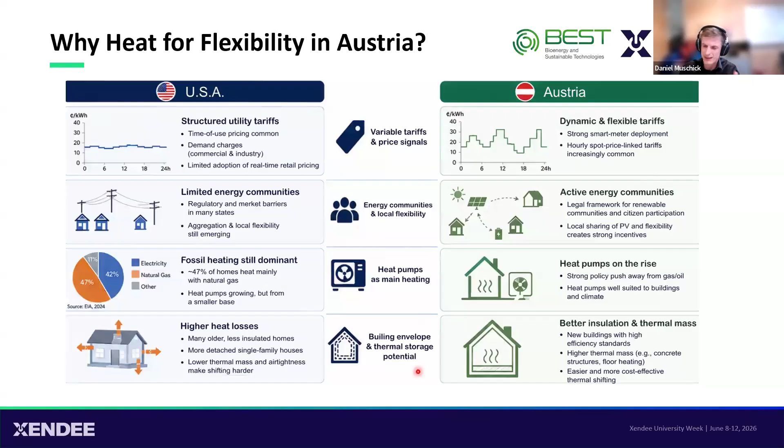So it is possible to use these buildings as a storage for heat and through the heat pump also for electricity. Just to give a very brief overview of what this means. So typically, if you have a single family home, you might have PV plus battery, and this battery might have 5 to 15 kilowatt hours of capacity.

And if you look at the heating sector, even with a rather small storage of 1,000 liters and only a temperature spread of 10 Kelvin, so 45 to 55 degrees Celsius, this already is more or less of the same capacity as a big battery, only for very small thermal storage. And so we have this capacity, and it's mostly available anyway. So if you build a home, you install a heat pump, you will have a heat storage, and you can make it bigger if you want.

And the price difference is almost or even more in some cases than tenfold. So it costs a tenth of the price to have the same capacity for heat than for electricity. Of course, you have to be a bit more honest here, because storing heat is not the same as storing electricity. If your heat pump has a coefficient of performance of 4, you only have a fourth of this capacity available as capacity for electricity. But still, it means that a substantial amount of capacity is there to shift electrical demand. So it's much more affordable.

And there's also something else that comes into play, which is that we have this building mass available. We have, as I said, well-insulated homes with a higher thermal mass. That means we can use the building itself as a storage. The problem with this is that heat is also a little bit more complicated, and that's where my research comes into play. Heat comes in different flavors. You have different temperature levels.

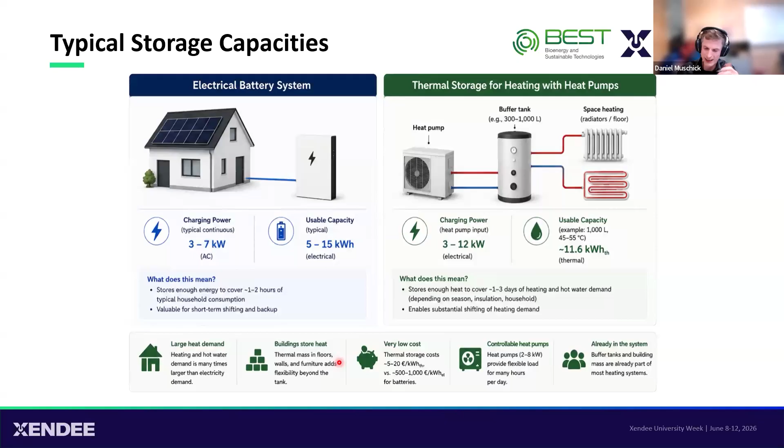And especially if you think about using the entire building as a storage, it's not as easy as that, because, of course, how you operate your system influences how much capacity you have. You can't just heat up a building and then leave it at that. The building will cool down again. People will get uncomfortable. So it's getting a little bit more complicated. In order to use all of this flexibility, we need some kind of predictive framework that can take this complexity into account. And so this is what we are developing at BEST.

So we're trying to tackle some challenges with our solutions. One of the challenges that we see is that we want to have optimal operation, not just any operation. So we are focused on optimization-based approaches using mathematical optimization. We have the big problem that many things here for using flexibility are volatile. The yield from photovoltaics, the heat demand, the power demand, everything is volatile. In our cases, with these spot market prices, even the spot market prices are not constant. They vary every time. So we need some kind of system that is predictive and can tackle these challenges.

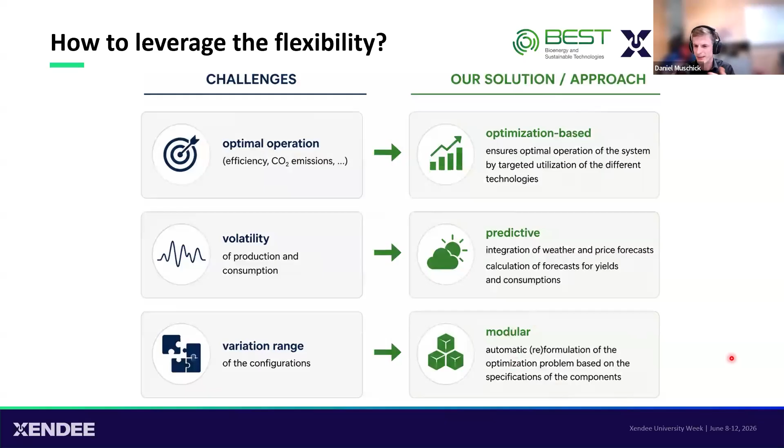And even more than on the electrical side, we have a very high range of variations in our systems. Which kind of buffer is installed? How is domestic hot water produced? Is it from the storage itself? Is an additional storage installed, and so on? Which components are there to produce heat? A boiler, a heat pump, a heating rod. So whatever the solution to this problem is, it needs to be modular and allowed to automatically adapt to different setups. And so this is what we develop.

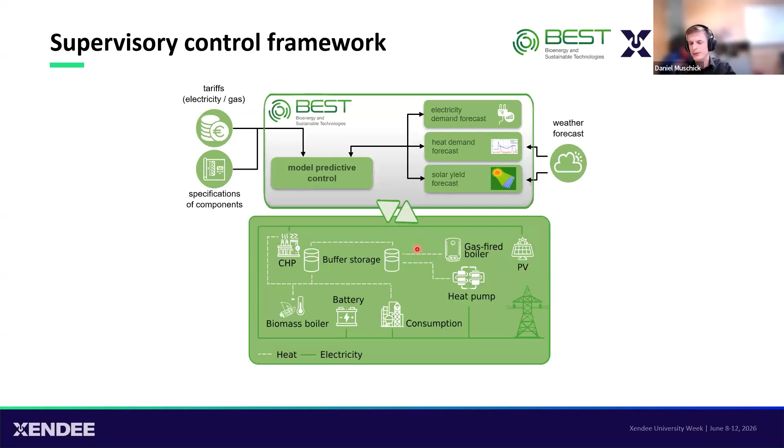It's a supervisory control framework based on model predictive control, where the input is a specification of what components are there and how they interact, information about future tariffs or predictions of future tariffs, a weather forecast that we query from weather services, and then from this derive forecasts of our own, predictions of electricity demand, heat demand, solar yield, and so on. And then we provide set points to individual components, to the heat pump, whether it should switch on or off, at which power level it should run, whether a boiler should switch on and off, and so on. And these set points are then executed, and we are re-optimizing the entire system in an iterative manner.

This is something that you've probably heard of a lot, because many people are doing this. What sets us a little bit apart, what I think is more or less our unique selling point, is that we really consider heat with all its facets, with the temperature levels. So if you use a conventional energy management system or some kind of optimization-based system, it thinks about energy as something that you can just add and subtract. So whatever the solar collector delivers, the heat pump converts to heat. So this is a PV heat pump. You have heat, and that's the demand.

But in reality, it's much more complicated because the heat pump has a different coefficient of performance depending on the temperature levels you operate it at, depending on the ambient temperatures. The capacity that you have for storing heat is largely depending on the temperature spread. So if you heat up the water from 30 to 50 degrees, you have twice the capacity than if you only heat it up from 30 to 40 degrees. But if you go to higher temperatures, the COP of your heat pump is lower, and so on. So if you just use an energy-based optimization, all of these aspects are lost.

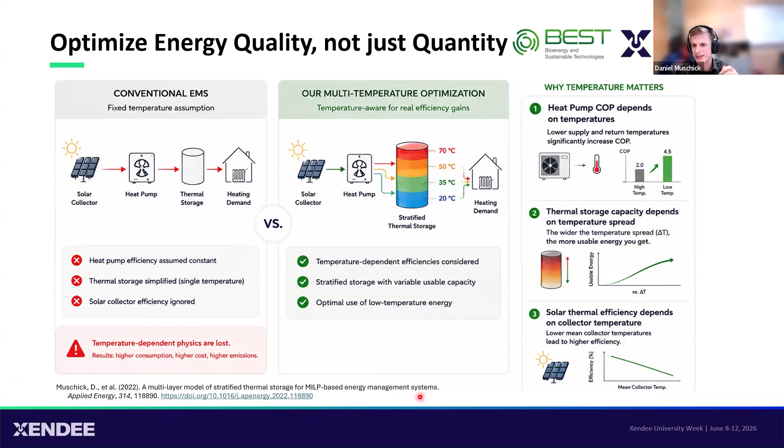And our approach uses a multi-temperature optimization. For the technical ones among you, it's still mixed integer linear programming based. There's a reference to the publication here, but it can tackle all of these challenges.

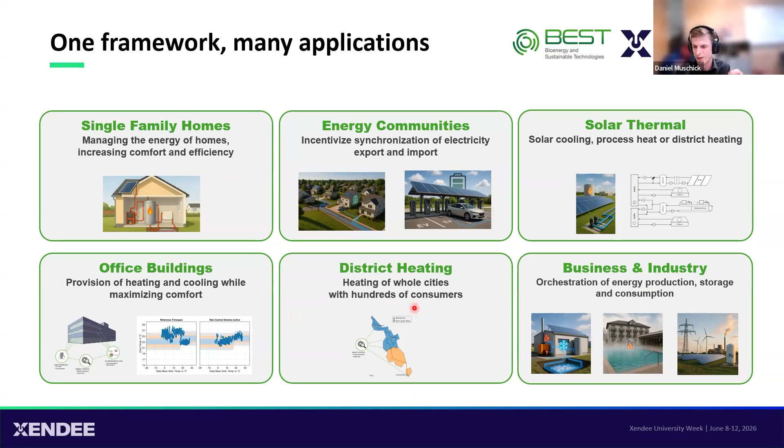So the big advantage of this modularity is that we can use the same optimization framework for multiple applications. We have, for example, single family homes. We have a product out there where we provided our framework as a service to a company which now sells it together with the heating appliances. We are currently working on energy communities, EV charging and so on. Solar thermal processes we did in simulations. Office buildings, I will show in the next slide. We've already implemented something there. For district heating, we did some implementations on a large scale, and for business and industry as well.

But in this case, it's a building with thermally activated building components. It's a slow system to react to changes. And if you don't have a predictive component in it, you typically operate it in an incorrect manner, and people start to open the windows and heat in summer and cool in winter because they are so uncomfortable.

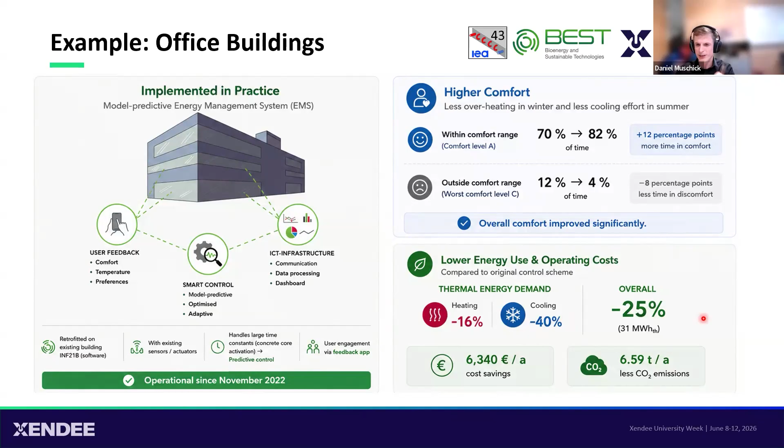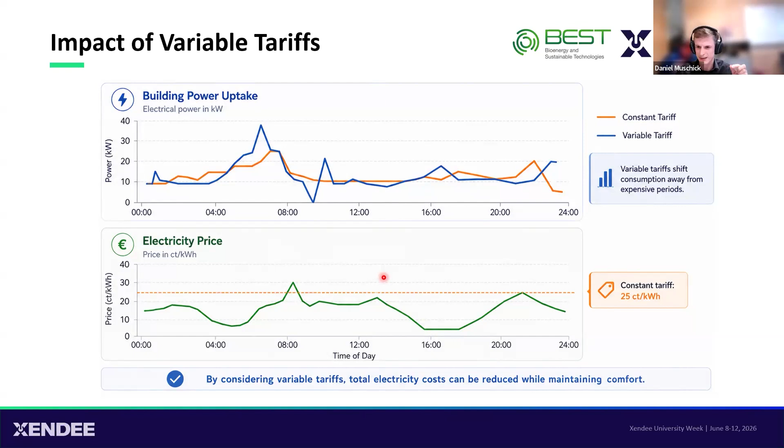So in essence, the main message is clear. We can use the building as a flexibility, but, and this is something I want to emphasize, it's not as clear cut as it looks. We can't just say this building has a capacity of so many kilowatt hours or megawatt hours. It really depends on how you operate it and what temperature comfort bandwidth you can use. So it depends on the time of the year and so on. It's very complicated if you can't use mathematical optimization to run it. Simple rules don't really use up the full potential.

We also use this framework to do scenario analysis and design on systems that rely a lot on heat. I will go quickly over this because I just want to show how complicated things in the heat sector can be. So this is a thermal bath where we have a splash basin that we can use as waste heat. It needs to be cleaned, and the waste heat from this cleaning can be used for a heat pump. They have a large PV installation on the roof that would largely exceed their current demand, so we have surplus electricity at their disposal. We have waste heat from water that we pump out of the ground.

But it gets very complicated. We have heat available at different temperature levels. We have thermal energy storages for cooling and for heating. We have heating demand from hotels surrounding the spa, which is completely different from the heating demand of the heating network that's also connected. And the big question for the operator was: we have gas boilers currently, but we want to change to something more renewable. How could we move this to renewable energy sources? How could we use heat pumps to solve this problem?

So which kind of heat pumps do we want? Do we want one big one, larger, or multiple smaller ones that are more flexible maybe? How large should the storage be, and so on? So lots of design questions that are very difficult to answer if you only look at energy and not at what the influence of temperature is on the result.

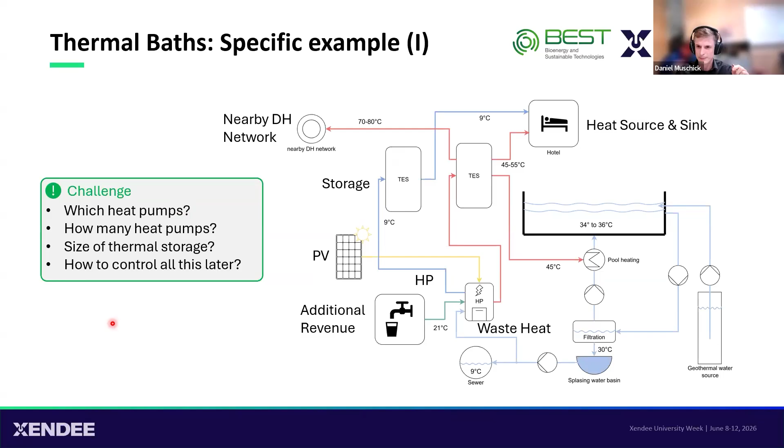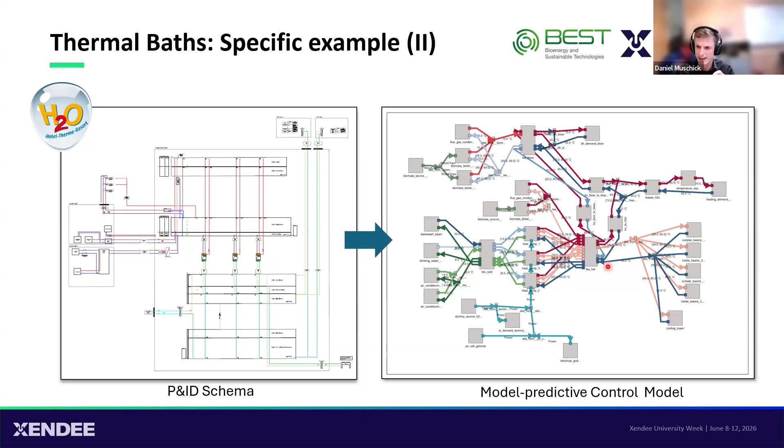But in the end, we were able to explore multiple scenarios. So it's not an optimization-based design as with Xendee maybe. It's really, okay, what if we use this kind of storage or this kind of storage, how would it differ, how much would it cost? So we really make yearly simulations based on this, and then decide which one of the configurations is the best one.

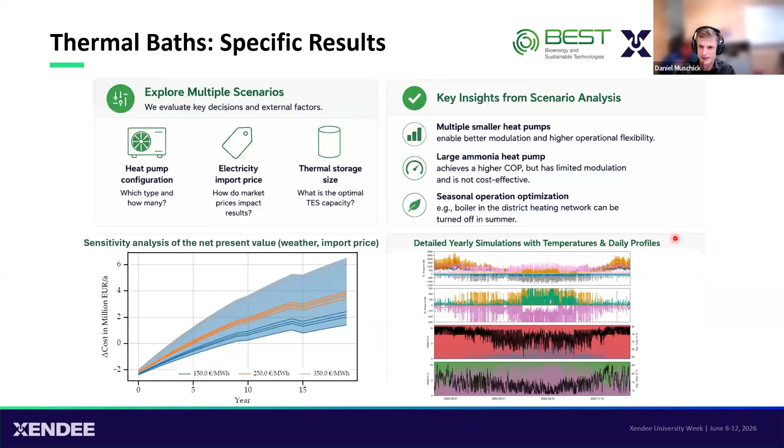And these would be the results in this specific case, that you should rather use multiple smaller heat pumps so you're more flexible in how you operate it. But in essence, the framework allows to do this also to provide design decisions. And this brings me to my conclusions.

So there are large market incentives, both in the USA, also in Austria, all over Europe, based on fluctuating tariffs, even more so in Austria with these really time-dependent tariffs. But we have at our disposal flexible buildings or storage in industry. So it's not really limited to this, but this can scale to large quantities.

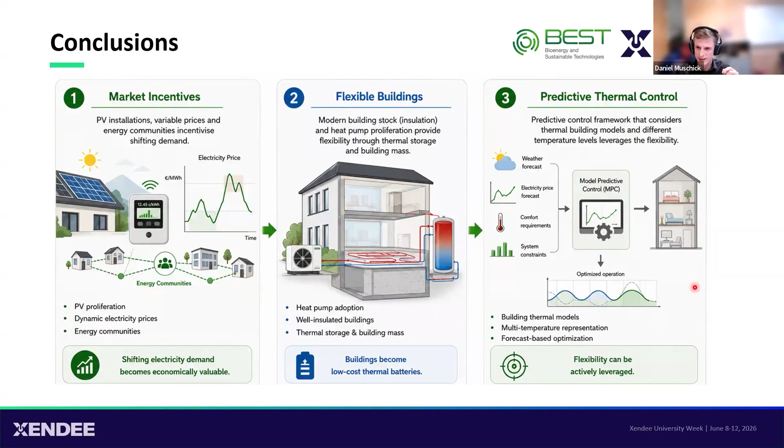And if you are able to predictively use your heat, so if you can look a little bit into the future and do the right thing, you won't be making the occupants of your building uncomfortable, and you will get the best out of your system. But you need a little bit of intelligence to do so, and only looking at energy, in my opinion at least, is not sufficient. You need to look at different temperature levels. That's my conclusion for today, and I'm looking forward to questions.

Thank you. Thank you, Daniel. And I know for a fact that this is really great research. So thanks for talking about this. There are a couple of questions which are maybe not directly related to your controller. And I have a couple of questions, but let's start here with a generic question from Greg.

What's the best building material? That's an interesting question. Yeah, what's the best building material to use in a building? I need to repeat this for everyone else. Yeah, sure, sorry. What is the best building material to use in the building to provide mass for optimizing heat retention? Can autoclaved aerated concrete serve this role? I don't even know this material, so maybe you know about this.

I don't know. I'm in a task on using buildings as storage, but I'm not an expert on material. I think one of the main challenges here is that you have two kinds of interests that are competing. On the one hand, you want to have the most capacity. So aerated doesn't sound like it has a lot of capacity, but it has a low conductance, so high insulation probably. So this would have high retention, but what I would prefer probably is to have a concrete slab and then some insulation on the outside, if you really want to keep the cool-down slope. But I'm not an expert on that.